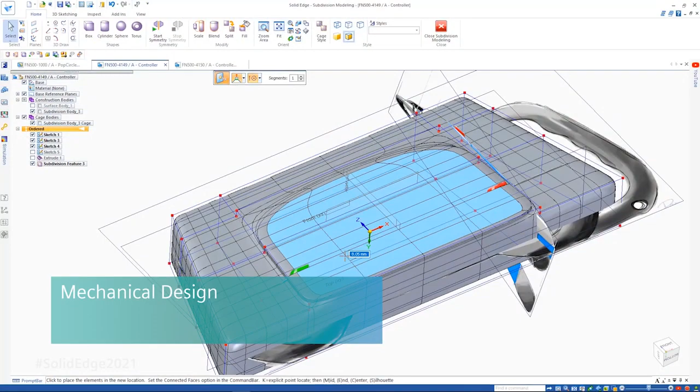Mechanical design. Design at the speed of creative thought with new subdivision modeling, lightning fast reverse engineering, a new user interface that's powered by artificial intelligence and an intelligent 3D model search engine. Electrical design. Enable fast, accurate 2D layout of industrial control panels with new cabinet design capabilities. Simulation. Optimize and validate designs with tighter integration between flow and structural simulation.

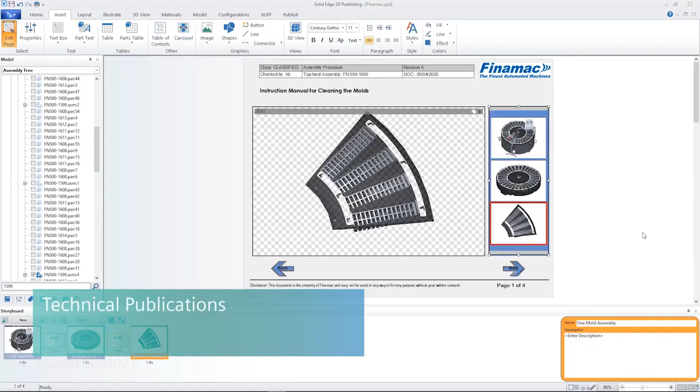Manufacturing. Speed up NC programming with a searchable post-processor database, new fast roughing, and adaptive milling. Technical publications. Produce high-quality documents and illustrations faster and directly from your 3D models. Data management. Take control of your data, saving time and money with rapid concept modeling and shape search capabilities. Cloud-based collaboration. Harness the cloud to edit and share CAD files and much more.

And there's so much more. Our beta customers are calling this the best Solid Edge release in years. We can't wait to share all of the details with you, so get ready to experience Solid Edge 2021.

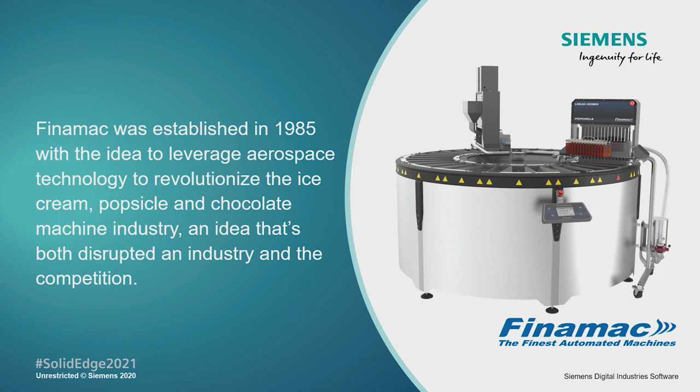I'm going to be using a data set here to talk through a popsicle making machine. And the really interesting part about this, I want to thank our partner Finamac. So Finamac's a company that had a great idea. They said, how can we take aerospace technology and apply it to machines like ice cream, popsicle, chocolate making. And they've really transformed their business, full digital transformation.

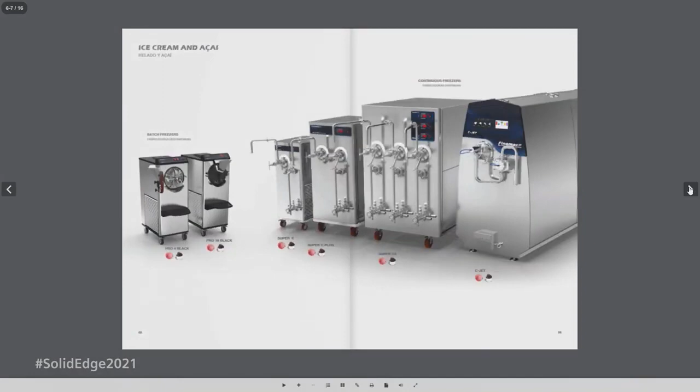If we take a look through their catalog, we can see all sorts of things. Ice cream making machines, popsicle making machines, chocolate, display cases. Here's some ice pop machines, mixture prep, all beautiful designs. The most amazing thing about this to me, however, is that none of this is real, what you're seeing. This is all digital twins. Every picture you see here is straight from Solid Edge, rendered, and into their catalog. So you're really seeing the full realization of the digital twin here with Finamac.

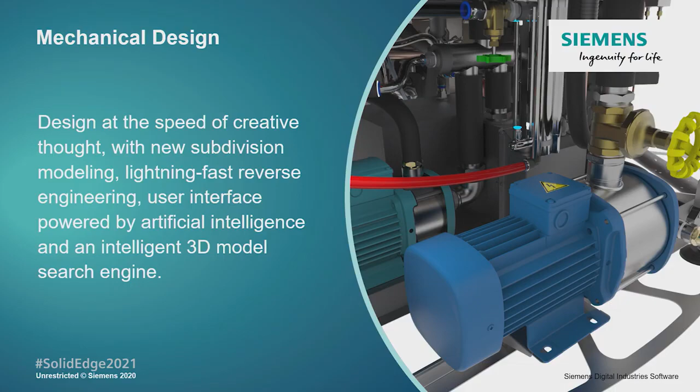So let's start with mechanical design, the core of what you do. New subdivision modeling techniques, very fast reverse engineering, and some new artificial intelligence capability I think you'll really like. Also an intelligent 3D model search engine. Quite a lot to see here just in this first section. So let's go through them one by one.

Subdivision modeling, reverse engineering, adaptive UI, core CAD, the stuff you do daily, and supplier catalog integration. And these are just a few of the things that we're highlighting today. There's a ton of new stuff in Solid Edge 2021 that I think you'll really enjoy and will be really productive for your company. And let's start with subdivision modeling.

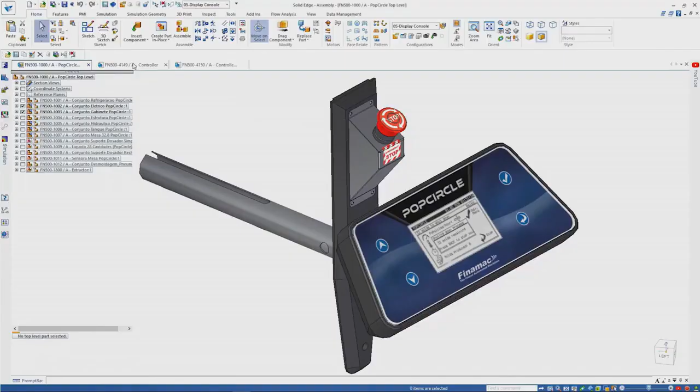This is amazing technology that allows anyone to create beautiful shapes. So in the past, this was really the domain of a specialist, NURBS and surfacing and all these complicated things. Now anyone can create beautiful shapes. Let's take a look at that with Oliver. Yeah, thanks Dan. So let's jump into the Finamac machine and we'll take a look at subdivision modeling. So here what we're going to do is design the portable controller.

And as Dan said, subdivision modeling is all about enabling you to develop distinctive organic shaped products, but without the need for expert knowledge. So if you're not the best at surface modeling, for example, here's your chance to shine. We'll start here with industrial design sketches as a guide, and really subdivision modeling can be simplified to 3 steps: the initial shape, a control cage to push and pull, and then blend options. We started here with a box shape and pushed out the lower portion using the control cage.

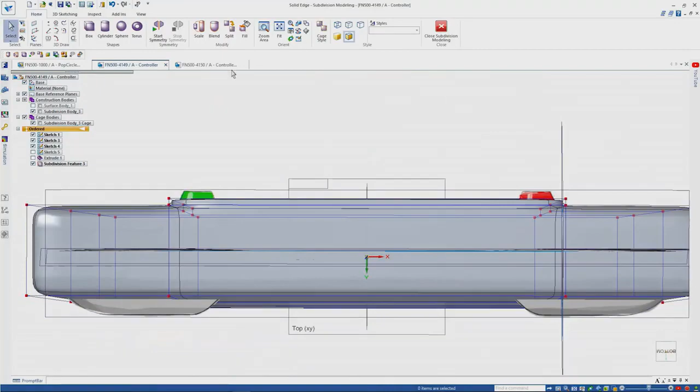A split operation can be used to subdivide the control cage, which in turn gives more control over the shape of the body. And the control cage can then be adjusted. Here we can accommodate room for the central area where we need the controller screen. A simple fill operation adds the necessary faces to the model.

And then importantly, this blend function can be used to control how sharp or smooth certain edges are. And while many expect to see only smooth blend options, that's not the case in Solid Edge. Here you can choose sharp blends wherever you like. Then to create the cutout for the screen, a series of similar push and pull techniques can be used to easily get the desired result.

Now, many parts are designed symmetrically, especially in the consumer space. To achieve this, we can simply define the symmetry plane, then any edits made on one side of the cage are reflected on the opposite side, as you can see here. And those of you who use synchronous technology in Solid Edge will be familiar with the steering wheel, and it's equally at home here to manipulate this organic shape.

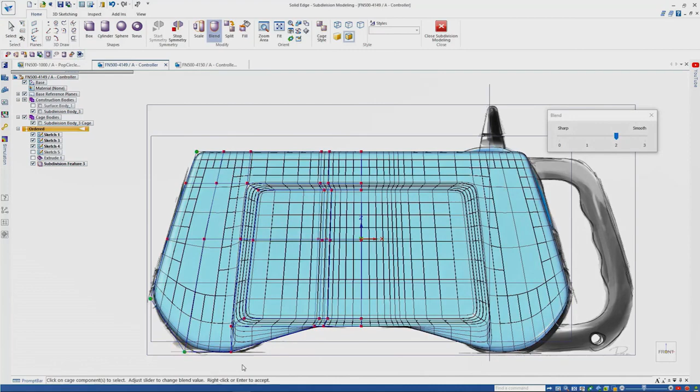For the notch at the top of the part, a simple move face operation creates the geometry that we need here. And to help keep track of what edges we've blended, the value of each of those blends can be shown at any time for every edge and vertex. And that's shown here.

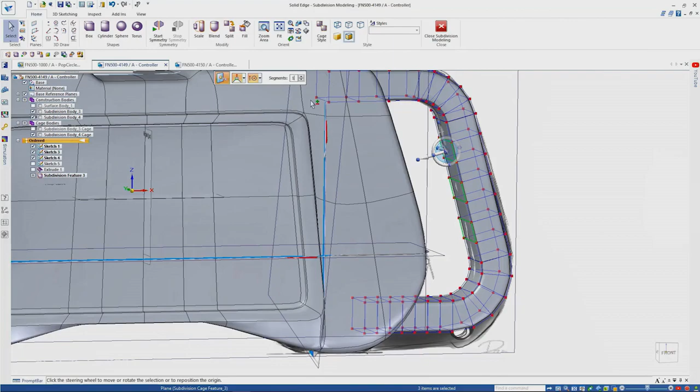Now we need to create the handle on the right-hand side of the Finamac controller. I'm not going to cheat here by pulling out something pre-created. We're going to do this live just to see how easy yet powerful this technology is. Same as before, grab an initial shape. Here we'll extend its form and then use the control cage to push and pull into shape, followed by some blend control, of course, for the finger grips. Nice and easy. Done.

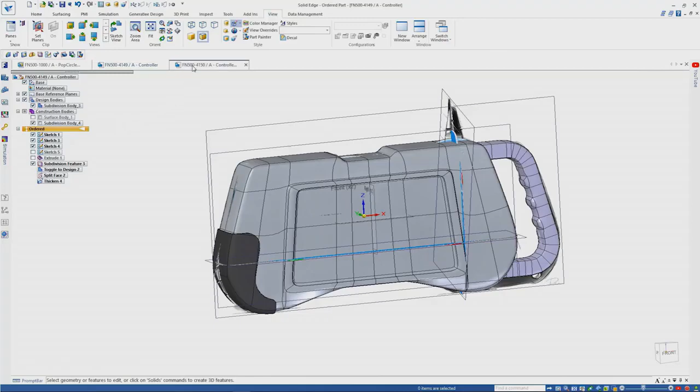Importantly, traditional solid and surface modelling techniques can be integrated with subdivision modelling. Here we can use an existing surface to split the subdivision geometry and then thicken the result to create the raised portion of the handle. And of course you can go on to add further details using more traditional modelling methods. But just look how easy that was. Something that would have taken traditionally hours, if not days. But here in Solid Edge 2021, we're talking minutes.

Back to you, Dan. Yeah, thanks, Ollie. I tell you, I've been around the industry a long time, and I've seen what it takes to do that kind of modeling, literally days to do a type of model like that. And to see that done so quickly live in front of us, it's really, truly amazing, even to an industry veteran like me.

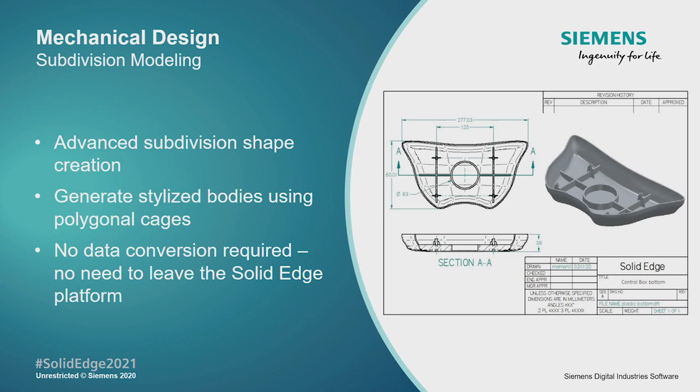So what you see is it's really easy to create those shapes, right? And you use the polygonal cage. Takes a little bit to get the hang of it, but once you get the hang of it, it goes really, really fast. The great thing about it is it's right in Solid Edge. It's built in. There's no specialized tools, no other products to buy. Available to you in Solid Edge 2021.

We're seeing some great feedback from customers around this. For example, Jason English at Ditch Switch. Ditch Switch, of course, makes earth moving equipment and ditch digging equipment. But they are bringing more and more stylized shapes. They want to see what can their industrial designers do with a new technology like this. I'm excited to see as well.

Next up is reverse engineering. We introduced reverse engineering a couple years ago, and we've been continuing to invest in it, making it faster, adding new features to it. I think you'll be really pleased with what we have in Solid Edge 2021. Let's take a look with Al. Yeah, thanks Dan. So we'll jump back into Solid Edge 2021. And we'll take a look at one of the recent additions to Solid Edge's reverse engineering toolset, deviation analysis.

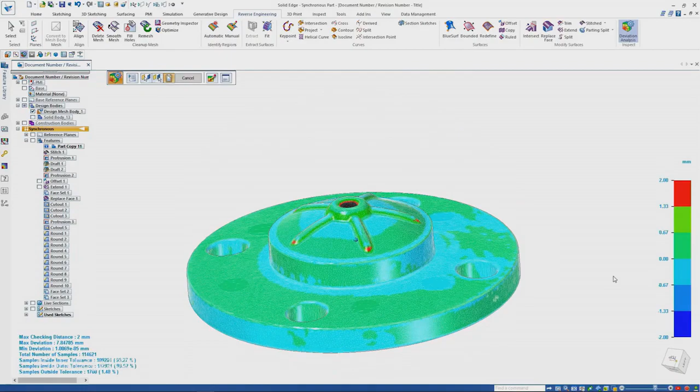This allows you to measure the accuracy between an original scan and the resulting reverse engineered model, or even compare scans. The result plot colour codes deviation for easy interpretation. Red means our test body exceeds the reference body, and dark blue depicts negative distances. On-screen callouts identify minimum and maximum deviation, and you can copy and paste any of the data for later reporting. Settings such as deviation range and result decimal places can be adjusted at any time, taking just seconds for the model to recompute. Back to you, Dan.

All right, thanks Al. Some great new capability there in reverse engineering. Of course, the deviation analysis, really those models that you're taking from the real world and creating a physical digital twin, how far do they deviate from the real world product? Easy to tell with deviation analysis. And importantly, it's really fast now. So things that used to take minutes now take seconds.

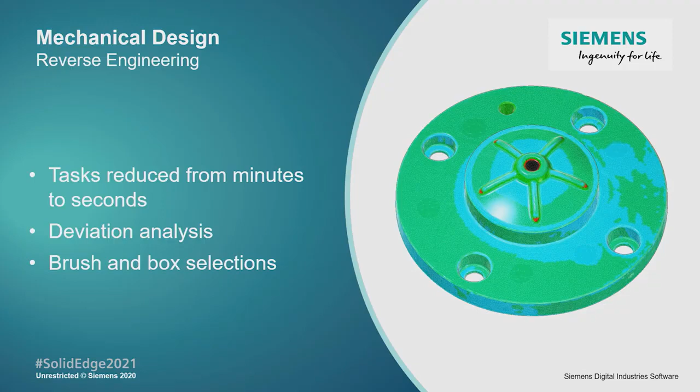Next up's Adaptive UI. This is a great new technology I'm really excited to bring to you guys. It uses artificial intelligence to predict what you'll do next. How does it do that? Well, it looks at what you've been doing in the past, and it looks at your patterns, and then it figures out what might you do next and presents those options to you. It's really groundbreaking stuff, so let's take a look. Yeah, very cool indeed. So let's jump into Solid Edge once more.

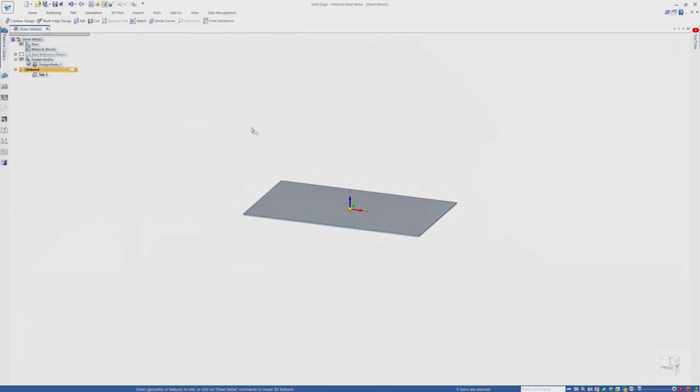And what you need to do here is keep your eyes on the top left of the screen. So Solid Edge 2021 includes an artificial intelligence-based assistant in the user interface up here to predict the next commands you need based on what it is you're doing and where you are in a design. So for the Finamac machine, there's lots of sheet metal work, and Solid Edge 2021 has learnt that from the design engineer, and rather than presenting tools that are commonly used across the industry, which would be good, it's presenting tools commonly used to the individual, which is excellent.

That's right, Solid Edge 2021 is now individually tailored to you, and what's more, it will continue to learn from you and dynamically improve how it holds your hand through your day-to-day work. And it's really interesting to watch, dynamically presenting the next selection of tools, even across environments, as we go from sheet metal to sketch and back, presenting those specific commands.

And I said at the start to keep your eyes at the top left of the screen. Notice that it's just one toolbar. This means you can remove the other toolbars to maximise your workspace. You have what you need right here, ready when you are. Back to you, Dan. All right, thanks, Ollie. That was great.

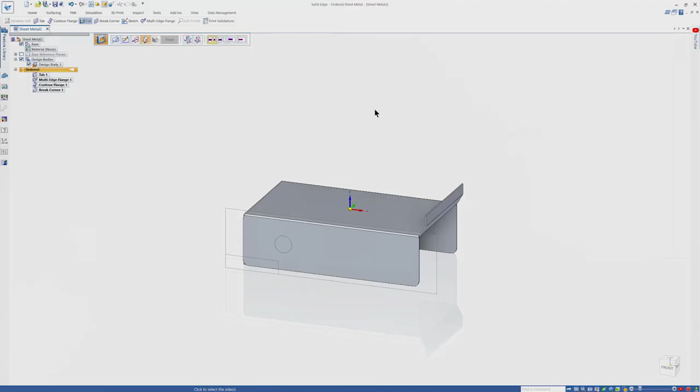As you saw, we're harnessing the power of artificial intelligence, and you see how it can really be applied to your daily work. So it's personalized to you. It actually learns from you. What it does after the first day of usage versus what it does after a week of usage will be a little different because it's learned from you. It's a little bit smarter.

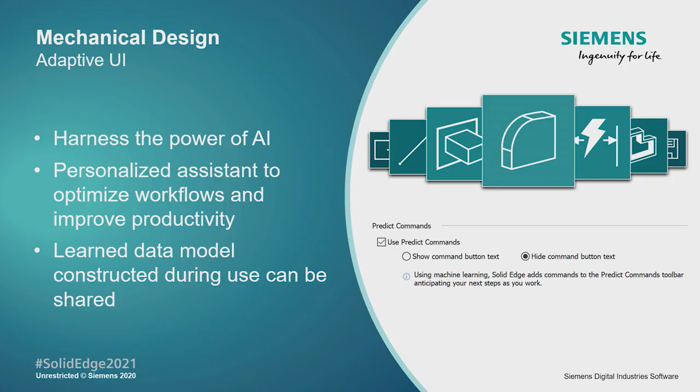And the great thing about it, though, is you can also share that with others in your company. So even though maybe your work isn't the same as other companies, within your work you may have similar things that people do. You can give them a head start on learning by sharing your piece with them.

In the area of core CAD enhancements, we've had a lot of work going on. As I said earlier, there's no way we can cover the depth and breadth of Solid Edge 2021 in this short update. But I want to show you a few things that I think will be really valuable in day-to-day work, the stuff you do every day. Ollie, let's take a look.

Great, thanks Dan. So yeah, let's jump back into Solid Edge one more time. And here is the Finamac Popsicle machine. Oh, by the way, the actual name of this machine is PopCircle. PopCircle for popsicles, I like it.

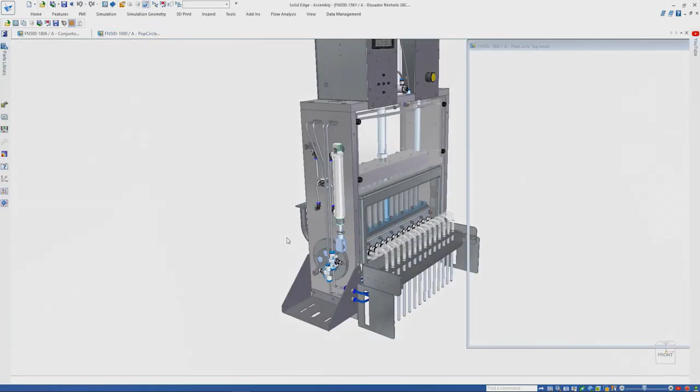First off, we're using large assembly mode here to make the most of our computer's resources and keep things performing as we expect. You can see that top left. And there's more to help with performance here also. It's common practice for suppliers to provide a 3D file of purchased items, such as the piston assembly that you can see, and using the new internal components option on import, all separate parts are contained within one single assembly file, with no parts written to disk. This enables faster import times, especially on larger data sets.

And even though these parts are all internal, we can still carry out many traditional operations, such as taking measurements, analysing mechanisms. Here we can see the correct operation of the piston assembly with its internal components. Furthermore, you can then assemble the item in a way it would work if it were a regular assembly. All in all, this provides increased performance and lower consumption of system memory.

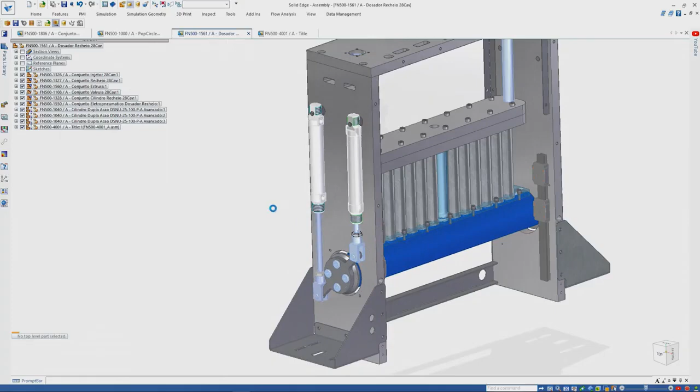Next up, reusing designs is now even easier. When copying and pasting multiple parts and assemblies between designs, existing relationships are automatically captured and reused in the target assembly. A step-by-step process guides you through the operations to add the external relationships required to fully position the parts. All internal relationships come along for the ride. This significantly reduces the time for these common operations.

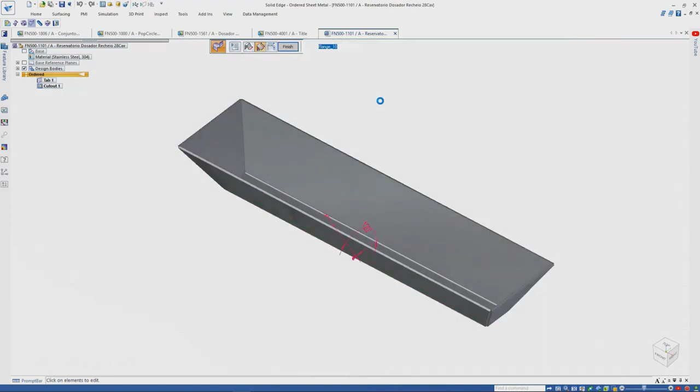Next up, let's step into sheet metal, where we've got a new multi-edge flange command that speeds the process for designing sheet metal parts. Multiple edges can be selected at the same time, angles can be defined, and miters automatically added. It's as simple as picking the edges and then pushing or pulling. In addition, partial or centered flanges can be defined, and trim options make light work of tasks that would normally require multiple operations, even with offset or gap distances as required. These sheet metal enhancements, along with many others, increase productivity and efficiency by being able to design parts faster and easier.

Next up, and also new in Solid Edge 2021, is a new decal command. This makes it quick and easy to add labels and images to parts. You simply select the desired image, you define the desired size, and then position it accurately using regular sketch relationships and dimensions. The decal can span multiple faces, as we see here. However, changing the position of it is as simple as modifying the dimensions or relationships that are assigned.

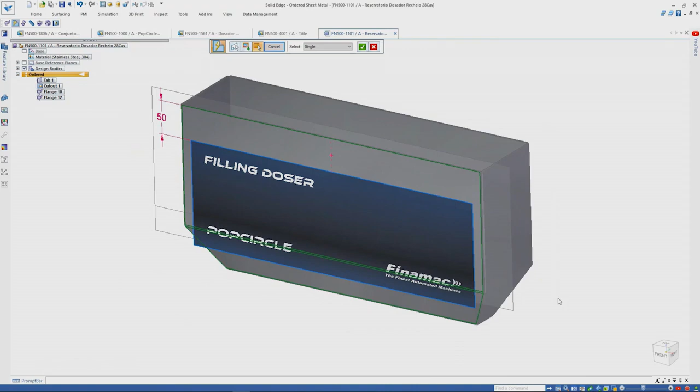Solid Edge 2021 also sees enhancements in frame design. We'll move to that next. Here, what we're going to do is place a cross frame which has coping applied so that it matches the circular cross-section of the vertical frame. Now we can specify a weld gap between two frames, and this is especially important in generating an accurate cut length of welded frames in our parts list.

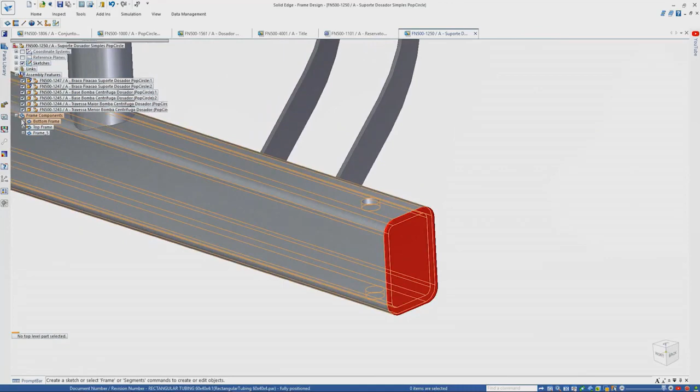Also new in Solid Edge 2021 is the end caps command, which allows quick definition of these types of parts within a frame. This single command provides a wide range of options. Simply select the frame cross-section, choose the material and specify the type. You can choose from different types like inward or outward, and even define offsets or have chamfered corners. The end caps are then reflected in the bill of materials, eliminating additional work for the user. Back to you, Dan.

Thanks, Al. Some truly great stuff in there, and as I say, just a little bit of a preview. But large assembly performance: our customers keep making larger and larger assemblies all the time, starting with a smaller assembly, getting bigger. Suddenly they're doing a machine. Next thing you know, they're doing a small factory. And we're keeping up with that and continuing to add capability to go bigger and bigger. Internal components. This is a really exciting feature.

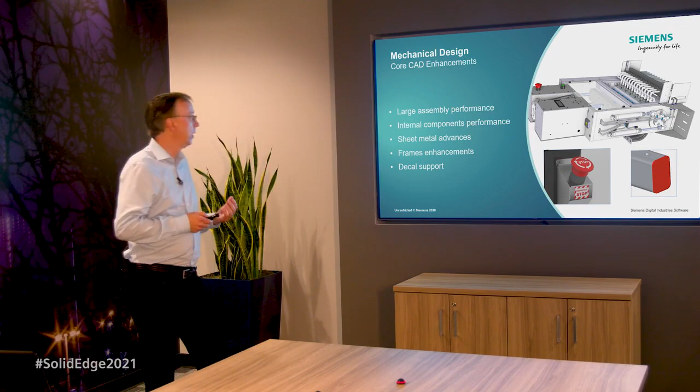Like today, it's used for importing parts, as Ollie was talking about. The ability to import an engine that has 300 parts and just jam it all into one assembly and not have to worry about all those individual part files because, honestly, you really don't care about them. Perhaps they come from a supplier. But that internal components technology also is going to allow us to leverage that in the future and do some more exciting things in coming releases as well.

The sheet metal advances are really amazing. I know a lot of you are Solid Edge customers because of sheet metal. We're the sheet metal guys and continue to be so. The new multi-flange with the ability to auto-trim against each other, that's unique in the industry. It's actually even patent pending right now.

Frames, we continue to build that out. A lot of machinery design customers building frames. End caps and the weld gaps provide great capability there. And decals, as you saw, it's not just decals on a flat surface, it's curved surfaces, it's across multiple surfaces. Really, really nice implementation.

And we see our customers really enjoying the Solid Edge 2021 release. For example, Luca Carminati at CMS has been working with the new sheet metal. They do a lot of sheet metal at CMS, and this multi-flange and auto trimming is going to save them a bunch of time.

And what about supplier catalogs? You're often getting different parts and catalog data from your suppliers. Different people make different products that you incorporate in your product. What if that was so easy to find, a bunch of different ways to find it and be able to utilize it in your design? It's going to save you a whole bunch of time. So let's take a look at that, Ollie. Yeah, indeed. That's all included in Solid Edge 2021.

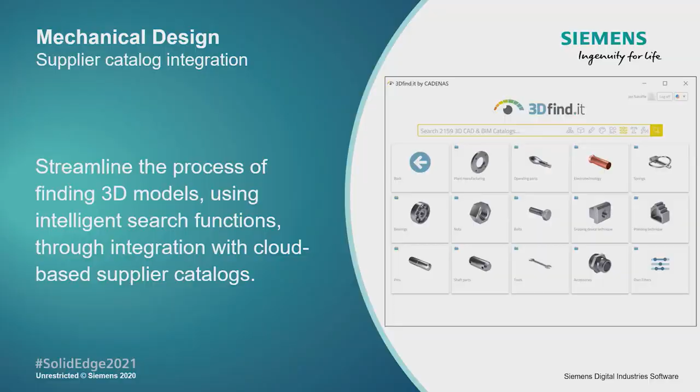Let's take a look. So this is 3Dfind.it for Solid Edge, powered by CADENAS, the latest search engine for mechanical, electrical, and electronic engineering. So here we are searching for a cable gland using text, narrowing down the search by filtering supplier, and we can even add additional search items, in this case to filter for ISO standard. You can even search using 3D geometry, sketches and much more.

We can visualize the 3D model for the part or even its 2D drawing, select the relevant individual parameters as you saw earlier, and then a single click brings it right into Solid Edge, ready to go. Back to you, Dan.

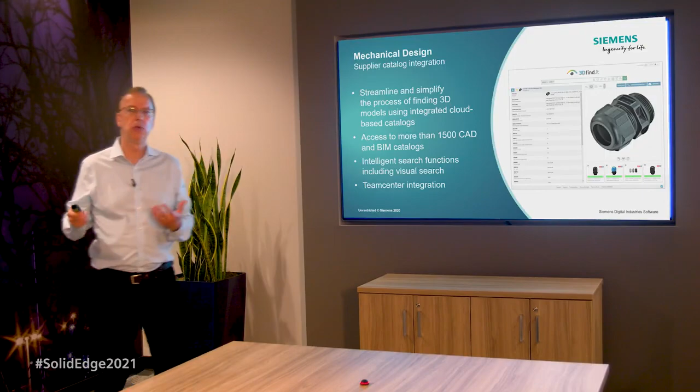Thanks. So as you see, you can really save a lot of time. Just reuse things that already exist, but the problem is usually finding them. So being able to go to a supplier catalog, find the suppliers you're used to working with, and get the products directly from them. Access to more than 1,500 CAD and BIM catalogs, and really lots of interesting ways to search, fully integrated with Teamcenter as well.

The folks at Ditch Witch are very excited about this. The catalog integration allows them to save a lot of time, not having to build parts, rework parts, but simply use what already exists. All right, so a lot of stuff there in mechanical design, more than we could possibly cover here. I invite you to look into it more deeply.

But not just mechanical design. We were talking earlier about digital twin. I think you really need to take a look at your business and think not only how can I be productive with mechanical, but can I expand? Can I go further in my production process perhaps? Or can I go sideways into electrical? What ways can I become more productive as a company by using the tools to enable your digital transformation?

So there's a lot to talk about in electrical, and first is wiring design. And there's a really important thing coming here in Solid Edge 2021, and that's cabinet and panel design. It's a whole different thing when you're wiring a tractor or a car than it is when you're creating industrial control panels and cabinets that go into the machines that you design. Full complement of tools there now. Okay, let's take a look.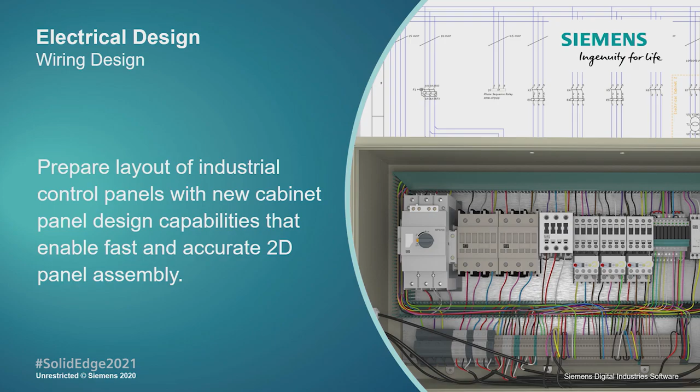So here we are in Solid Edge wiring and harness design. We're going to add to the existing electrical design work for the FINAMAC machine by laying out the machine's control panel. Solid Edge 2021 has new cabinet panel capabilities that allow us to reuse the schematic intelligence that you know of Solid Edge to generate the panel layout.

Placing the correctly sized cabinet based on our specs, we can add additional items such as backplates, channels, mounts and other hardware. We also need some wiring ducts, so here we'll place a series of channels. Dynamic dimensions provide accurate feedback, and industry standard profiles are available.

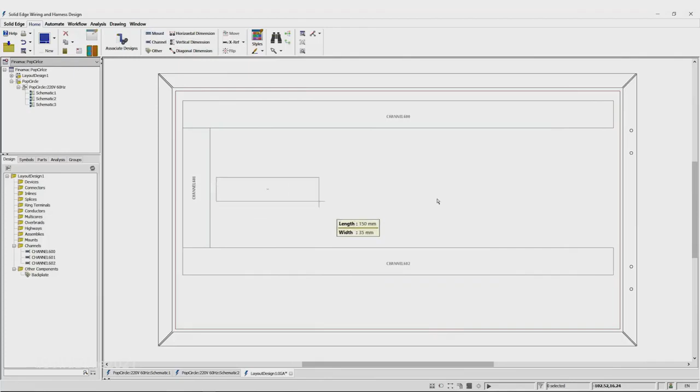Using the mount command, we can add the necessary DIN rails to which we'll attach electrical components. Again, accessing the properties allows us to choose from industry standard sizes and profiles. Adding some dimensions to the mounting plate, as well as the channels and rails, will help document their positions.

Associating the new layout design to the schematic allows us to place the relevant logical electrical components. Placing devices is simple, and there are many ways in which this can be achieved. We can place single objects or multiple objects at the same time. Shortcut options allow control over snap points, rotation angle, the order of placement, and much more, all of which are dynamically previewed during this placement process.

The last few devices are being placed onto the top and bottom rails. Yep, nice and quick and easy. And of course, what's going on in the background and what's automatically being updated is a bill of materials as we've been adding these devices to the layout design. And the bill of material IDs can then be easily generated with balloons.

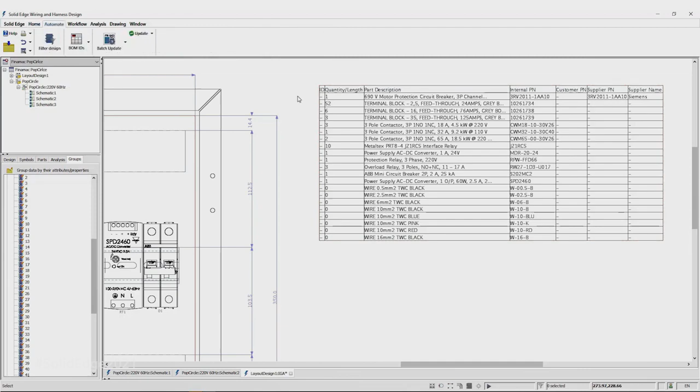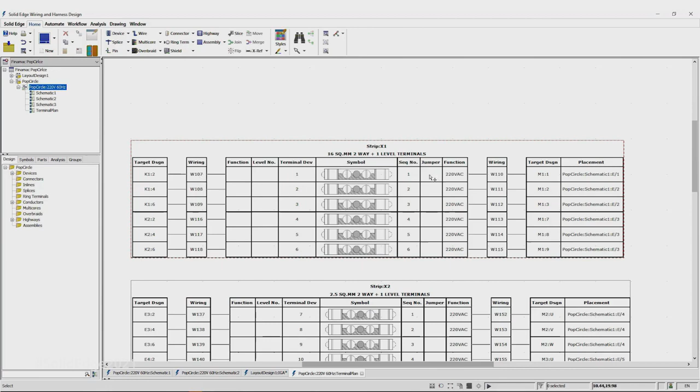Finally, for the panel is the terminal plan, which assists in the assembly and wiring of the terminal strips. The fully associative terminal plan tables are automatically generated, documenting the terminal blocks along with their specific symbol, physical sequence in the strip, and details of where the wires terminate at both ends of each block.

Now that the electrical design and documentation is complete, we wish to share this information with our MCAD colleagues. And this is where connected mode comes in. It makes it really easy for the ECAD and MCAD worlds to come together and collaborate. So here we're switching to Solid Edge 3D CAD. We have connected mode on, and you can see the existing wiring details that have already been added to the design. We can then cross-highlight components between the two disciplines.

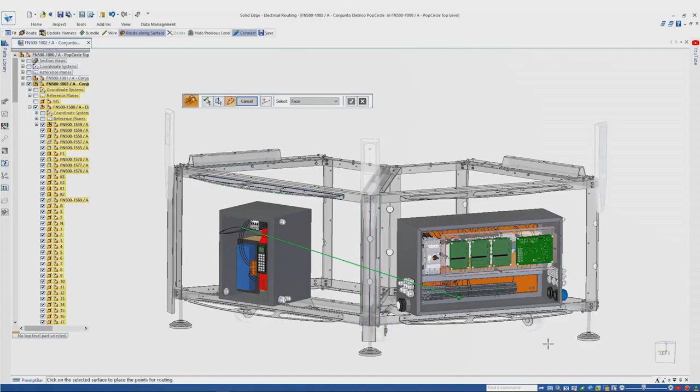Now we're going to bridge in some final conductors to connect the two cabinets together. And then we can bundle these wires together. And to keep the bundle neatly organised within the assembly, we're going to use the new route along a surface command, which provides a highly efficient way of routing the bundle path around the contours of this frame.

All we need to do is simply pick the bundle to be routed, select the faces of the geometry the bundle needs to follow, and then plot some points to define the path of this bundle to route the ends of the bundle through each of the glands on the respective cabinets. Awesome, done.

All right, thanks, Ollie. I will tell you, I am not an electrical engineer. I don't do electrical, but just watching that to me is quite amazing. The amount of productivity you have in terms of laying out the cabinets and panels, really remarkable. So if you're doing something that's using more manual techniques, you're going to find this is going to just add amazing productivity to your day.

And what you saw there, first of all, is that customizable, table-based interface to do the device snapping to rails and so on. We didn't get a chance to look at it, but there's also an auto routing capability on your schematics that'll save you a lot of time. And of course, this is now all upward compatible to the Mentor line of products.

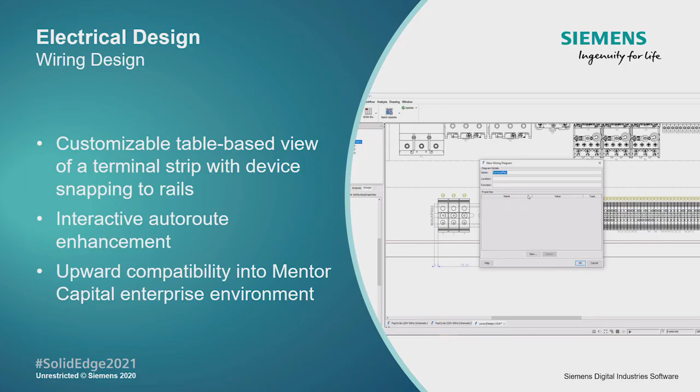You got to see a little brief there of routing along irregular geometry. It can be even a sculpted shape, maybe something you did in subdivision surfaces. We also have that connected mode now extended, so it's not only working with Solid Edge Electrical, but it's also working with Capital. And finally, we have integration to more third-party products as well.

And then in the area of harness design, now to be clear, when I talk about harness design, I'm not talking about the 3D that mechanical engineers might think of. Harness design is also something you do in 2D. How are you going to lay out the harness for production? So when we talk about harness design, that's what we're talking about here.

You have the ability to visualize that in Teamcenter as well as tie it back to requirements. It enables tracing to the requirements themselves, and it allows interactive auto routing for the full signal path.

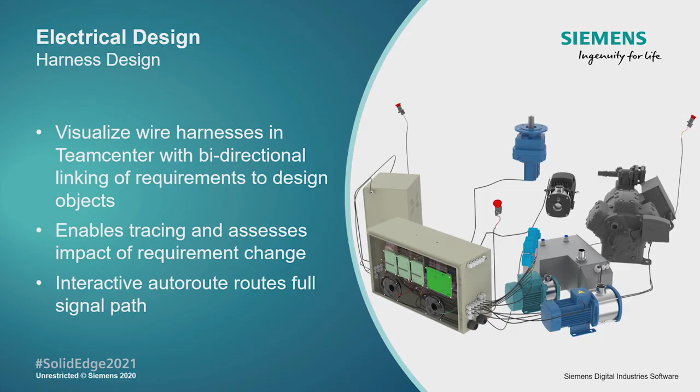In the area of PCB, actually some great stuff as well. Of course, it's all about that collaboration between electro and mechanical and the ability to bring those things back and forth, maybe propose a design change and accept or reject it. That's all supported through the IDX 2.7 format, as well as we have the mapping of 3D models between the Expedition product, for example, from Mentor and the Solid Edge product.

We're seeing a lot of traction here with people who are adopting this product. From our portfolio, if you think about it, Solid Edge being more than mechanical, right? Mechanical and electrical with the wiring, the harness, and so on. And you see how they work together. Folks like Matthew Fresco at WashTec are taking advantage of this already.

It's a true digital twin. It's not just a mechanical CAD digital twin. It's a digital twin including electrical, and it really solves a bunch of problems that are normally found in the field. So I think you're going to find this is a great area for you to expand into.

Next up is simulation. Lots going on there. Of course, we have products for stress analysis and modes and vibrations, all sorts of different things, flow analysis. You're going to see some great integration between those two products happening in Solid Edge 2021. Let's take a look. Ollie? Yeah, let's jump back into Solid Edge and we'll take a look.

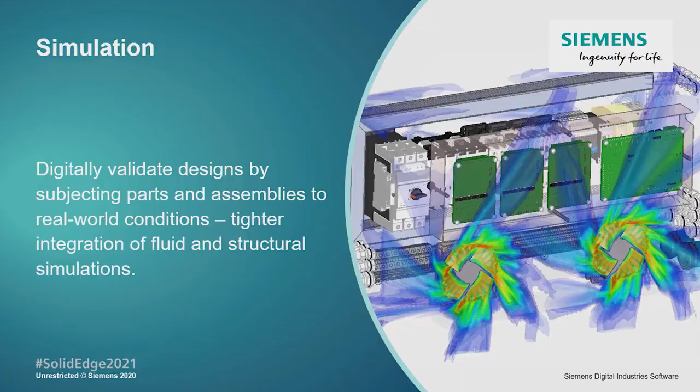So back into the Popsicle machine. And first off, we're going to look at Simcenter FloEFD for Solid Edge, which features new capabilities and modules for electronics cooling applications. The new package creator specializes in the rapid creation of accurate thermal models of electronic packages with correct definition of chip layers and solder balls on the chips.

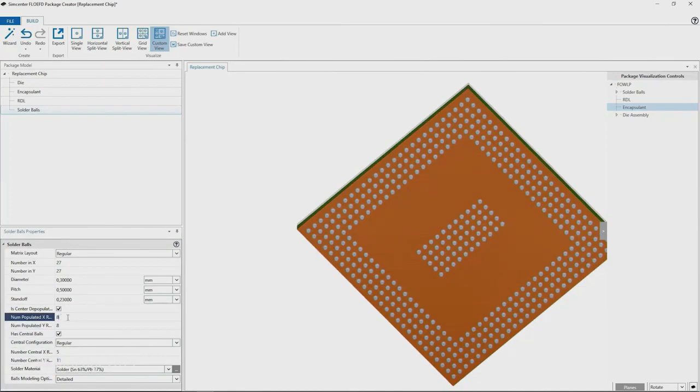Here we're going to see clearly the thermal effect on this PCB board and then in turn its effect on the overall electronic enclosure. And looking at the flow trajectories, which we can turn on, around the fan area, this shows how the fan swirls the air and pushes it into the side of the enclosure to cool it.

We can also see how the fan is performing on the fan curve and show the operating point of the individual fans based on the fan curve data from the fan manufacturer. ISO surfaces are another way of illustrating where airflow is going and showing the velocity as a volume plot.

In addition, Solid Edge 2021 now has the ability to apply the results from a computational fluid dynamics study, which we've just seen, as an input to Solid Edge's structural thermal simulation studies. Focusing on the tank containing the liquid bath that freezes the popsicles and looking at the results of this thermal flow study, we can see how the cooling liquid interacts with the assembly. These results can then be sent to Solid Edge's structural simulation by using the export results command.

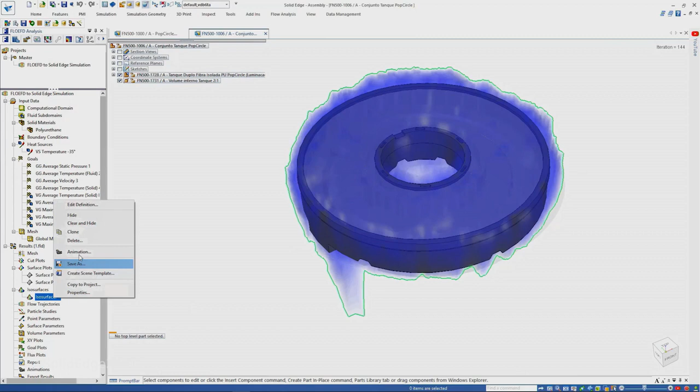Now let's get the structural analysis set up. So also new for Solid Edge 2021 is the ability to suppress or remove any components directly from the simulation pathfinder, making it easy to test the design on a subset of the study geometry. When defining the material for the insulating core, another new feature is the ability to highlight key material properties that are required for the study we're attempting to solve, as can be seen here by the green colour coding. This makes it easy to ensure we have appropriate properties defined for an accurate study.

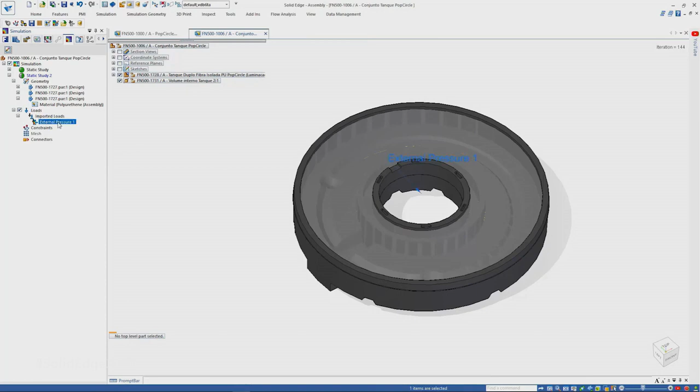Our last step before solving our structural study is to import FloEFD pressure or thermal results. These are automatically applied directly to the correct bodies and also the faces in the study. And the result, where we can see all the pressure from the cooling liquid and where it's causing the highest areas of stress on our design. And it doesn't stop there for new capabilities in Solid Edge 2021. Also new is the ability to probe edges, ultimately saving us time from having to select each individual node. Cool, back to you, Dan.

Thanks, Ollie. Like I say, I've been in this industry a long time and I'm still amazed by some things I see. The stuff around flow simulation, the integration of that with the stress simulation, it's just amazing stuff.

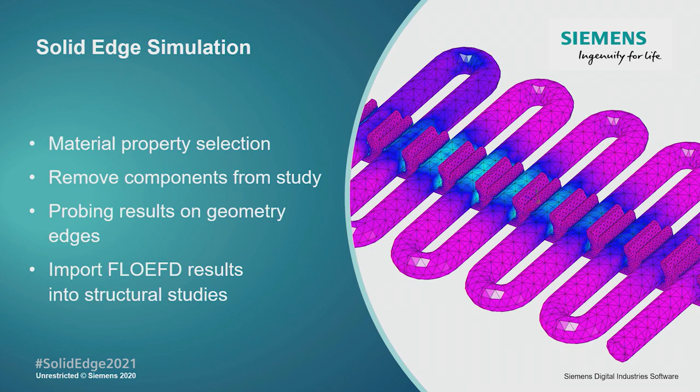So we continue to enhance Solid Edge simulation in many ways, improving the interaction with materials, making it easier to remove components from the study, being able to probe the geometry more easily. But really that ability to tie flow and structural together is really quite amazing, right? So we're able to take the information from flow and read that directly into Solid Edge for, let's say, a stress analysis.

In addition to that, you saw the new Electronics Cooling Center. Full suite of capability for electronics cooling, very deep. The other thing we've added is something called BCI-ROM, which means probably nothing to you. But what it should mean to you is months to minutes. This is, again, amazing technology. A study that literally would have taken 6 weeks of CPU time can be done in 3 minutes. And in those 3 minutes, you'll be within 5% of what those 6 weeks would have given you. Truly amazing stuff coming out of the team, and I invite you to take a look at it.

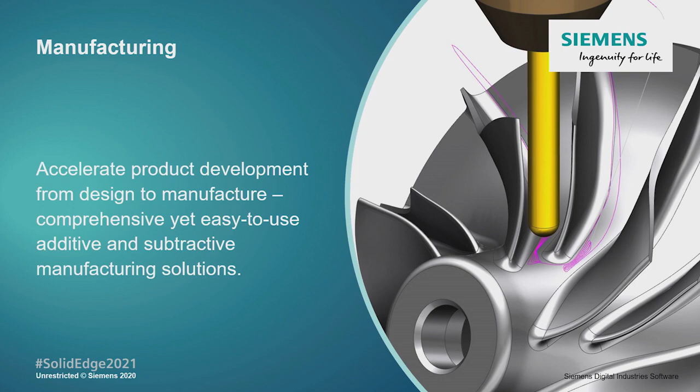Next up is manufacturing. Accelerating your product development, whether it's additive manufacturing or subtractive manufacturing, we have the tools for you. So let's jump into Solid Edge CAM Pro. And new in 2021 is integration with PostHub, an online library of post-processors that makes integration with your machinery easy and quick. With new posts added regularly, PostHub is searchable with filters for machine type, manufacturer, controller type and kinematic configuration. Once the desired post processor has been selected, it can be automatically downloaded and installed, and verifying the post output is nice and simple.

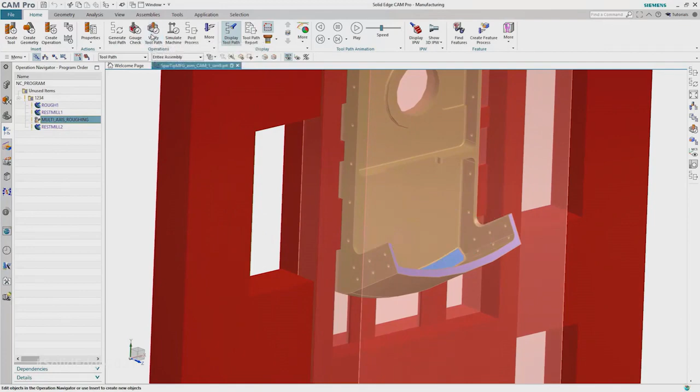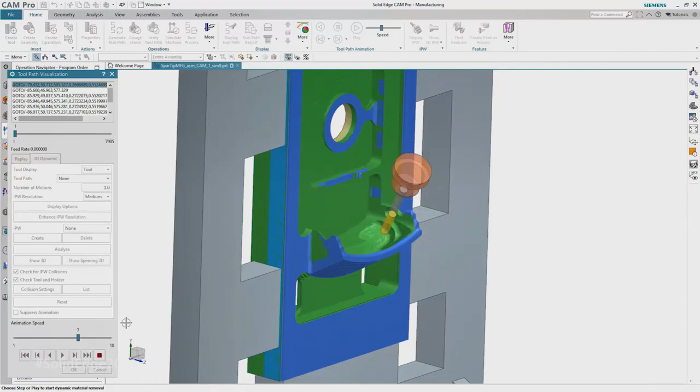Next up, we're going to take a look at Solid Edge CAM Pro's multi-axis roughing, which is a great tool for quickly removing stock from aerospace parts like the one shown here. Multi-axis roughing uses adaptive roughing technology to machine parts in the most efficient manner. And viewing the multi-axis roughing path in replay mode allows visualization of the tool axis tilting as the cutting tool removes the material. The 3D dynamic simulation option shows tool motion and concurrent material removal. And notice how multi-axis roughing efficiently removes material without ever burying the tool in the cut. That's extremely important for efficient machining.

With machining simulation, users can view the actual machine motion, which delivers a really high confidence level and is necessary for complicated multi-axis machining centers. That's what you see here. And Solid Edge CAM Pro supports G-code based simulation, meaning the virtual machining center is acting upon the G-code just like the real machine will. Back to you, Dan.

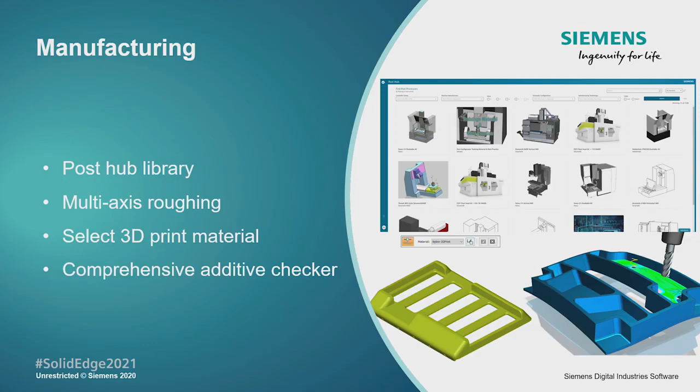All right, good stuff. So we continue to push both additive and subtractive manufacturing forward. You can see the new PostHub library. This has been a thing in industry that's been difficult for people to deal with, getting posts for their machines. Much easier now with the PostHub library. You saw the multi-axis roughing, really state of the art. We've also added some things in additive we didn't get a chance to look at, but better material selection for what you're going to print your part with, and bringing together various additive checkers into one comprehensive additive checker that just makes it a whole lot easier to interact with.

Another part of manufacturing, though, is nesting, right? A lot of you do sheet metal. We talked about sheet metal earlier. And in fact, the ability to lay those sheet metal parts out in the most efficient way possible. We have the most efficient algorithm in the industry for doing that. I want to talk to you about some of the new enhancements in that area. So let's take a look, Al. Yeah, thanks, Dan. So let's jump back into Solid Edge.

And if your machine looks like this, as in consisting largely of sheet metal parts of varying materials and thicknesses, you'll really benefit here. So, jumping into Solid Edge 2D nesting, you can now search the complete assembly for appropriate sheet metal documents. And it'll automatically sort the parts by material type and thickness as this progresses in. By selecting the material type and then thickness, you can quickly make patterns from multiple jobs, enhancing shop floor efficiency. Flat patterns are then automatically extracted from the parts, saving valuable time here.

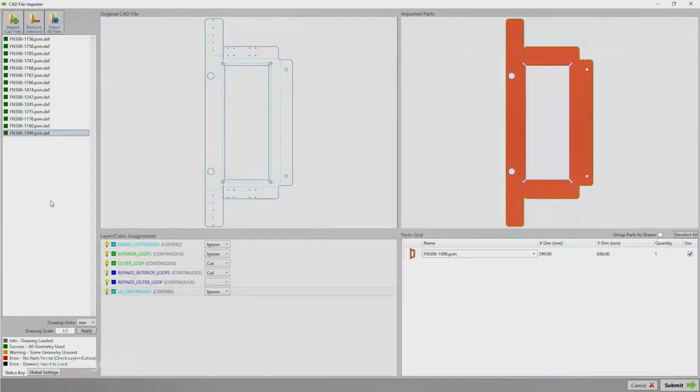And assembly occurrence counts now automatically define part quantities, while the job multiplier quickly calculates the amounts needed to manufacture multiple machines. Solid Edge 2D nesting supports multiple sheet sizes. Standard sheet sizes are stored in a library, and you can easily define your own custom sizes. And here's Solid Edge 2D nesting doing its thing, finding the most efficient use of material. Savings in material costs alone, gained by the highly efficient algorithm, as Dan mentioned, can quickly offset the software investment.

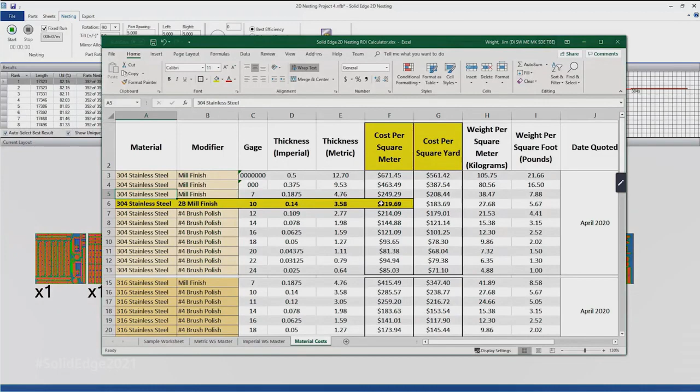And last but not least, 2D nesting has a new quick cost estimator. From user-defined costs per square metre or yard, 2D nesting quickly generates the accurate cost of material that are needed for job cost accounting, quoting and inventory purposes. We can see that being applied here in the software and automatically giving ourselves that estimated material cost. Really nice.

Back to you, Dan. All right, thanks Al. So 2D nesting, I think, is a great opportunity for many of you doing sheet metal to save a lot of money, honestly. It's a very efficient algorithm. It's the most efficient algorithm in the industry. We've also enhanced it to deal with odd-shaped shapes, like you see in the upper right here. The ability to nest something maybe out of cloth or leather, things that have an odd boundary are now supported.

Adding the cost of material, the job multiplier, just makes it a lot easier for you to get your job done, sorting by material or thickness. Some really great new stuff in Solid Edge 2D nesting, and I suggest you check it out.

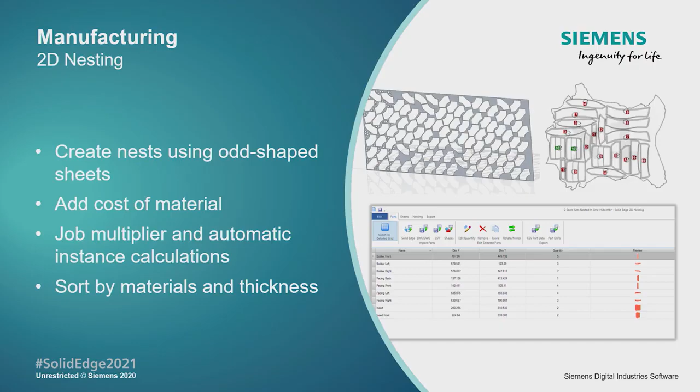Next up is TechPubs. So over the years, you've generated tons of Solid Edge data. What if you could take advantage of that and be able to generate beautiful technical publications super easily? Well, it's faster than ever in Solid Edge 2021. Thanks, Dan. So yeah, let's jump back in one more time.

And here we're going to put together an interactive maintenance publication, something that can be used on a touchscreen tablet by the maintenance department. A host of new and improved functionalities make it simple to create clear technical publications, be it for manufacturing, installation, or here, maintenance, and it can be interactive content like this, or hard copy paper content too.

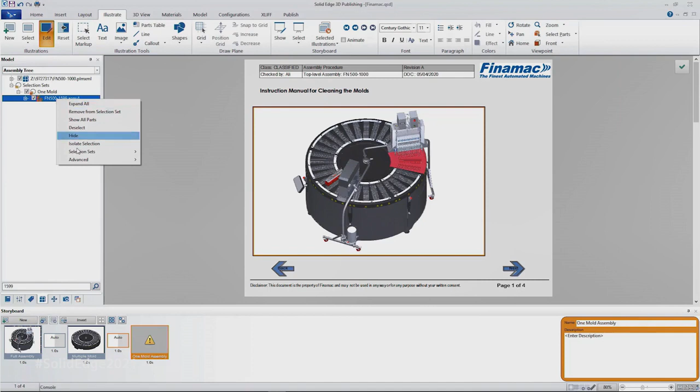New selection capabilities in Solid Edge technical publications allow the organisation of groups of parts and subassemblies into named sets, making it easier and faster to select, show or hide multiple parts at the same time. Here we'll focus on this single mould assembly to build a document that describes the cleaning process. The new view carousel function makes it easy to navigate through illustrations within a storyboard. And creating an interactive view is fast and easy.

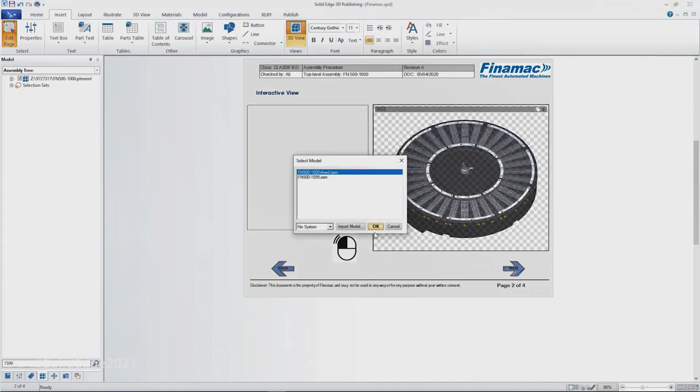Here we can accommodate multiple 3D views on a single page, and selecting a part on the right displays it in the view on the left. The next page includes step-by-step instructions for cleaning the mould assembly. The best way to visualise this process is to mimic it through an exploded view with dynamic text boxes providing instructions. Adding buttons to step through the process is made quick and easy by using the new manual markup resizing options.

Not only can you import all native Solid Edge exploded views, but you can also create custom exploded views within Solid Edge technical publications. Adding an interactive parts list is as simple as drag and drop. The parts table is automatically displayed based on the 3D model's metadata. A new powerful and versatile parts list editor also makes it easy to customize this table.

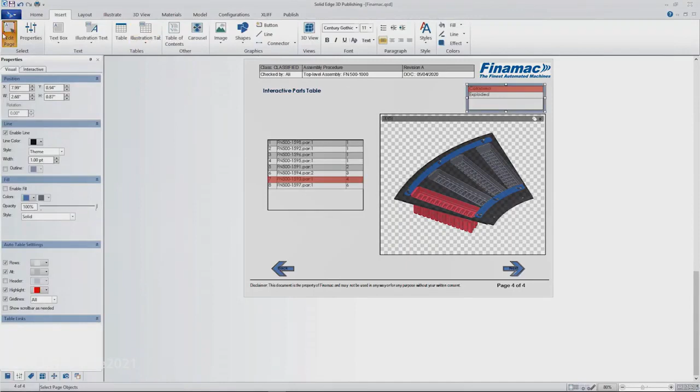Adding an illustration table allows us to quickly switch between the collapsed and exploded views of the mold assembly. You can see that here. The project can be published to industry standard formats such as 3D PDF or, in this case, HTML5. The rich interactive documentation can be viewed in any web browser without additional plugins.

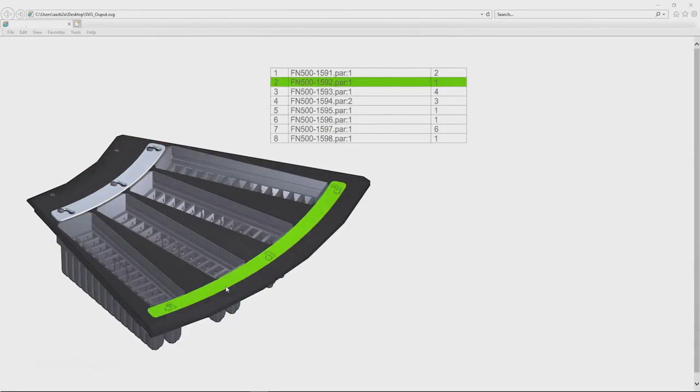Also new, 360-degree publishing to get an all-round view of your product. The automated functionality allows for more robust presentation of your designs, a great way to capture images for product and stakeholder meetings. Also new, clickable SVGs, which allows us to publish an illustration in this interactive SVG format. When a part in the model is selected, the corresponding row in the table will also be highlighted, and vice versa. And furthermore, being SVG, it's beautifully crisp and clear. Back to you, Dan.

Thanks all, looks really good. So with TechPubs we see that you can take advantage of the data you have today, right? As I said, people have generated literally millions of parts. Some customers have upwards of 15 million parts. The ability to use that in your technical publications directly, very valuable. Faster performance, now integrated with Teamcenter as well. And you saw some of the great new features, the carousel page object, the 360-degree publish. All good new stuff in Solid Edge 2021.

That leads us, of course, to data management. As I say, you've generated a lot of data. Whether you're a company that's got 2 seats or 200 seats, we have you fully covered with our scalable system. So let's take a look at some of those enhancements now.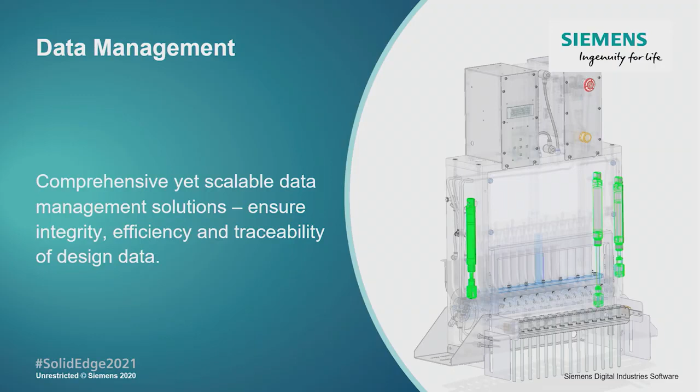Yeah, thanks Dan. Let's jump back into Solid Edge. And we'll kick off with the new concept modeling workflow using this popsicle mold. So the concept workspace is a space where a designer can explore new ideas without committing the files to Teamcenter. Think of it as a sandbox where you have the freedom to make any changes to a design without compromising the existing models. Here we're going to create 2 concepts of our design.

We can then explore our first concept for a new mold retaining mechanism by removing some of the existing components, then making some changes to the mold plate, deleting features, as well as adding some new ones. Using this first concept as a starting point, we can go ahead and create another one which can be explored later. The designer has the freedom to create as many concepts as desired.

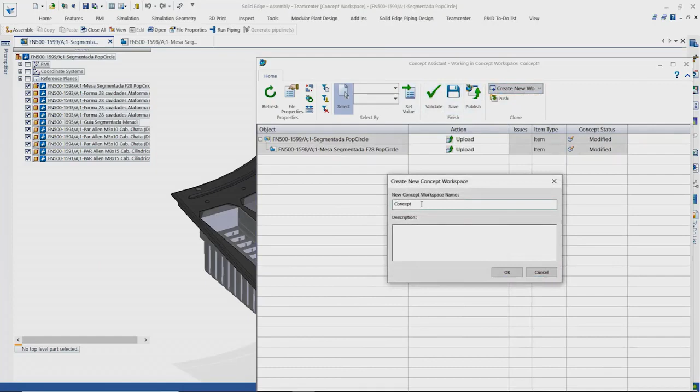With concept 1 still the focus, we can add the appropriate mold retaining components to finish the first assembly concept. And going back to the Concept Assistant, we can switch to concept 2 and open the design data. Here what we're going to do is assemble the different mold retaining components for this idea. And once the concepts are finalised, the data can then be sent to Teamcenter.

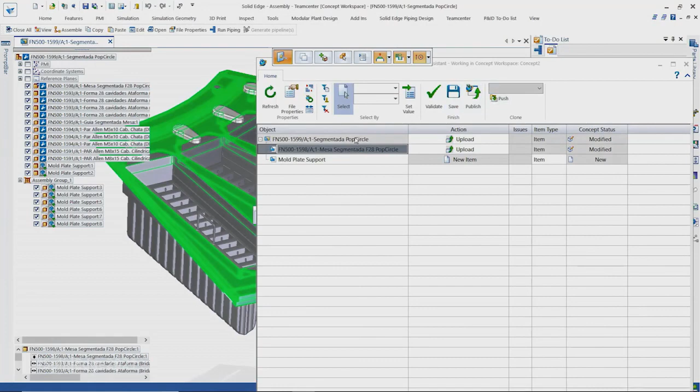The Concept Assistant helps with this process and provides options to filter for new or modified components or even revert any changes made. The 3D Compare tool allows quick visual check on the changes between the concept and the server versions, and the user has full control over the actions for any modified components. Once everything is defined, the data from the desired concept is seamlessly sent back to Teamcenter.

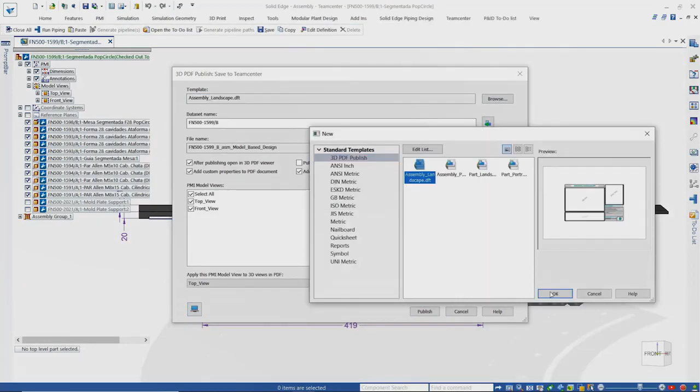Also new for Solid Edge 2021 is integration of Solid Edge's model-based definition content. Now all the downstream manufacturing information, including the MBD PDF output, is automatically captured by Teamcenter and visible within the item revision of the part or assembly.

Moving over to Solid Edge's built-in data management, a new Open As command allows users to control exactly how a file is opened from either Windows Explorer or from the most recently used menu. This allows full control over how an assembly is opened, such as defining the correct configuration, setting read-only status, applying large assembly options, and much more.

A new shape search capability allows designers to more effectively reuse existing models and prevent recreating designs from scratch. You can simply use an existing part or even model a basic representation as a basis of shape search. Solid Edge then scans the available database for similar looking parts, and filters are available to approximate the match criteria.

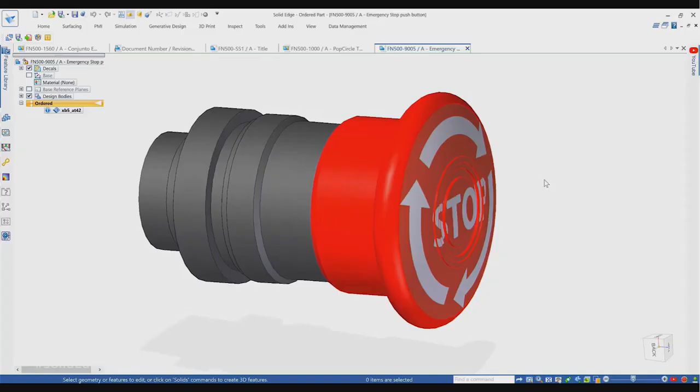Shape search results are compared with the original part, and the accuracy of the size is displayed as a percentage value. And once the desired part is found, a single click opens it into Solid Edge and makes it ready for use in our design. Cool, back to you, Dan.

All right, thanks all. So a lot of stuff to see there in data management. First up, Shape Search, new product for Shape Search that allows you to reuse that data you already have. There's nothing more inefficient than recreating something you have, but if you've got 100,000 parts or 1 million parts, how are you going to know? Well, the way you're going to know is through Shape Search, now available to everyone.

We've also enhanced Pack and Go, which is a very popular Solid Edge feature, allowing it to trace the links even outside the current context. And the Open As command is super handy. It may not be obvious what you use that for, but for example, if you want to open an assembly with a certain configuration, you can do that easily from File Manager and open it to a certain configuration. Good stuff for your everyday use.

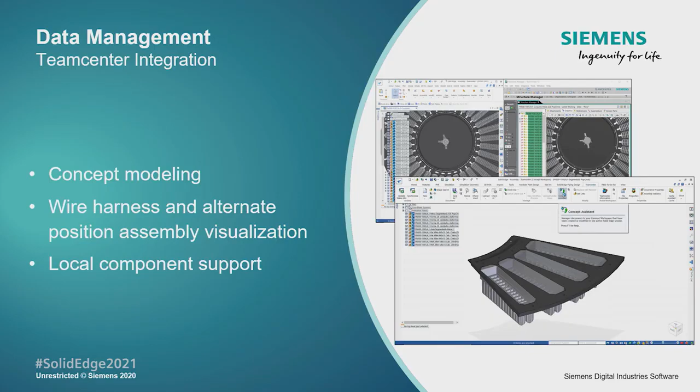On the side of Teamcenter, the Concept Modeler is really a great new technology. Being able to make changes and try out what-ifs without committing a part number, for example, and deciding whether it's a brand new part or a revision to an existing part. Wire harness and alternate position assemblies now visualized in the Teamcenter portal. And of course, the local component support. We added the local component support in Solid Edge, fully integrated into Teamcenter as well.

Next up is cloud-based collaboration. So more and more we see our customers around the world are having to collaborate across their business in different locations, collaborate with customers or suppliers. And the cloud really enables this. Some great new capabilities for cloud-based collaboration. Let's take a look. Thanks, Dan.

So being cloud-based, browser-based, means you can use this on any device, be it your phone, be it your tablet or PC, and it also works with any common CAD file types. It's not just Solid Edge, it could be NX or other common file formats that you might work with in your company. Now, being browser-based, it means it's instant on, but we can improve that productivity in terms of guidance. So here we've got a user-assisted guide that holds your hand each step of the way in using any of the capability in this app.

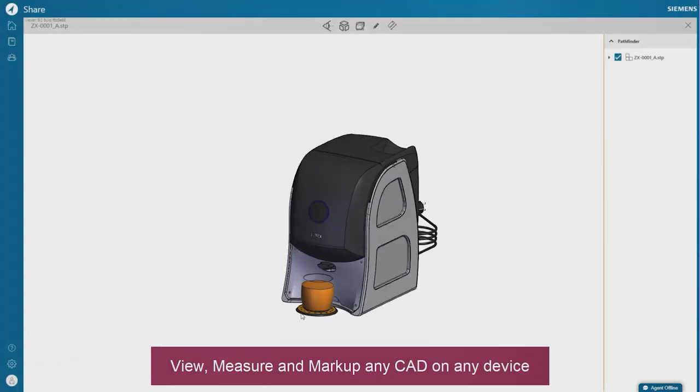So here we're setting up a new project. It's guiding us to upload files into this project and into our cloud storage. And we can do this in two ways, either directly into the browser, or I'm going to show you some desktop synchronization later on. So this data here could be PowerPoints, could be Words, could be PDFs. For CAD files, here we've got an integrated 3D view environment. We can hide and show components with the tree on the right-hand side.

And there's other great tools here, such as Automatic Explode. So here we can understand the assembly makeup, great for design and manufacturing reviews. And no pre-setup explode needs to be handled there. Also, it's got great tools such as the section views or cutaway tools. And if we want to take measurements on the fly, that's another tool here.

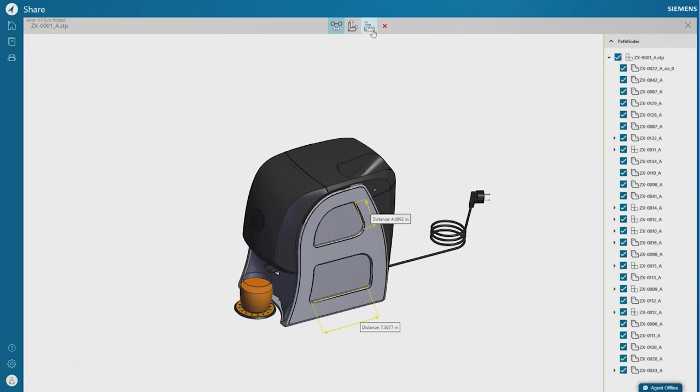And notice just how easy the interface is. It's what I call non-technical. So it's not just for design engineers' use. It could, for example, be used in a sales situation. Nice and easy to get to any of the product features. So here we're taking measurements on the fly. We can also change the units on the fly too.

And in this interface, we can also add markups or commentary. There's some tools to do some redlining. We can choose pre-selected shapes or just do some freehand sketching over the top of the 3D model. And we can also include text annotations as well. And any of these markups get recorded in the tree.

And what's great about that is you can start to have a conversation back and forth on any of the issues that you're tracking, or maybe it's positive sales points about the product that you want to call out. And it also records who has made that markup and when it was made.

Okay, so I talked about this other option of getting data into your cloud storage. We looked at uploading into the browser. Also, what's available is desktop synchronization. So this multi-CAD project that we've got here, on our desktop, that's represented simply as a folder. So any data that we bring into this multi-CAD folder, either we can drag and drop in, or we can just save in, for example, from Solid Edge. This will get synchronized in the background as you work into this app.

Okay, so importantly, also another great capability in this app is the sharing with whoever you like. And it's nice and easy. Just simply type in the email address of the person you want to share with. You can choose the access permission or the access level that you want to grant. So for example, here we could just choose view or view and download. You can protect your intellectual property here.

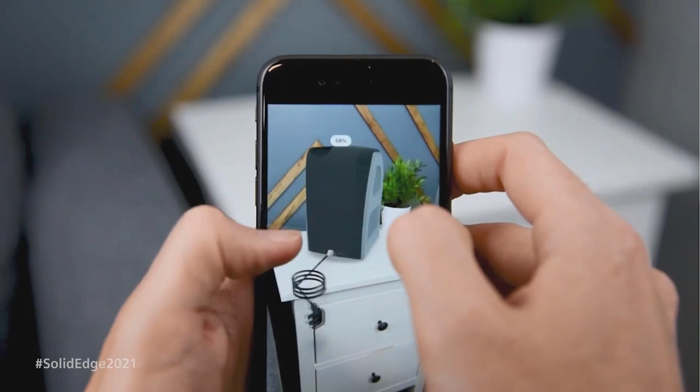And then finally, augmented reality. So this will take the 3D CAD model, it will superimpose it onto the physical environment, snap it onto any surfaces that are seen through the camera lens, to scale by the way, and then finger gestures can be used to manipulate that model. So here this orange juicer really was that large, and that's a great use of augmented reality to get that immediate design feedback.

Back to you, Dan. All right, some great new stuff there. Cloud-based collaboration. Again, your organization has expanded, you have people in different locations, you have customers, suppliers, pulling that all together through this new cloud-based collaboration app. It allows you to synchronize the files automatically because you can just drag and drop it on your desktop, it'll automatically be uploaded. You can do the view and markup, as you saw, you can communicate with your customers or suppliers.

And of course, it's all secure. You can share with who you want to share with, but also keep your intellectual property very safe. And finally, augmented reality. You saw that ability to mix the physical world and the digital world, a digital twin mix, if you will. Very powerful.

Customers are already trying this out in early access. PJ had the following to say about it. He's really got a distributed design and manufacturing organization, and his ability to use the new cloud collaboration tools allows them to communicate and collaborate across the globe quickly and easily. I think you'll find the same.

So I invite you to start your digital transformation journey. You've seen a lot of features in Solid Edge 2021. There's mechanical design, there's electrical design, there's tech pubs, there's data management, a full suite of tools. And I encourage you to start your digital transformation journey today, or if you've already started it, take that next step. Integrate manufacturing, integrate electrical. The sky is really the limit.